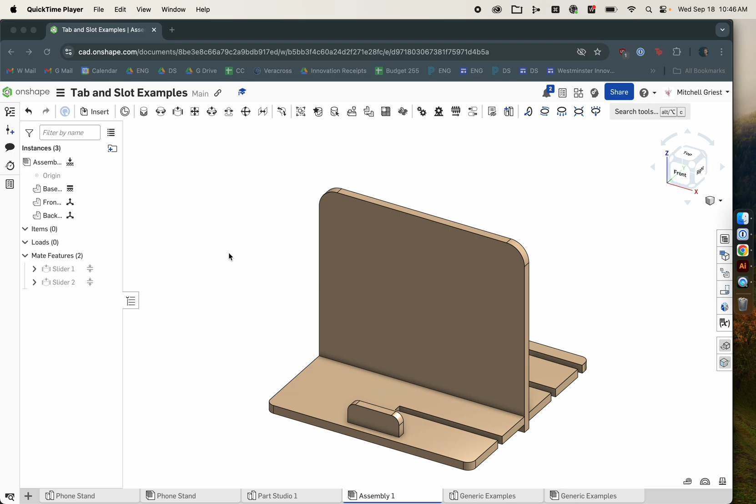Welcome to a quick tutorial where I'm going to show you how to create a nice laser cuttable file, kind of crossing from OnShape over to Adobe Illustrator so we can send it to the laser cutter. So for this example we're going to use the phone stand from the other tutorial where we've got these three different pieces that we've designed. So we're calling this kind of the front stop, the back stop, and the base.

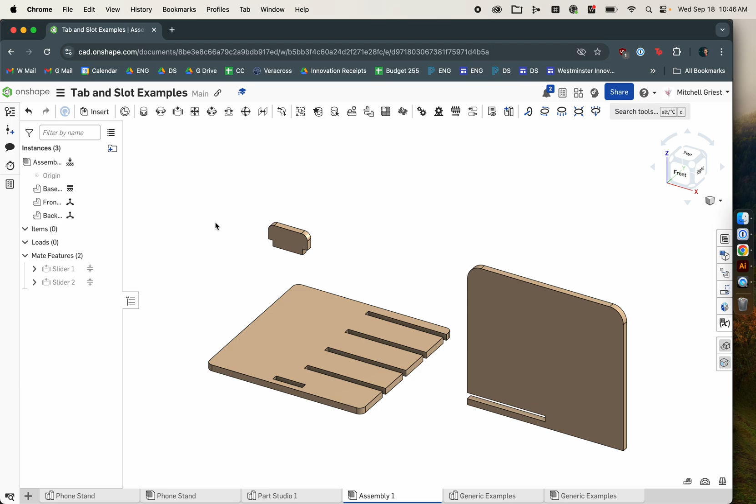So when we want to laser cut something, we can't actually send it directly from OnShape into our laser cutter. We have to go through Adobe Illustrator first. So we're going to create three what are called DXF files, which are just a type of vector format that the laser cutter and Adobe Illustrator both understand and that OnShape can export.

So we're going to go to our part studio, not our assembly, and let's hide all of our parts and just turn on just the base. If our parts weren't overlapping, we could do this without hiding things, but no big deal, we'll show just the base. If we click once on this top surface, right, this yellow area is what we want to give to the laser cutter. It only is going to understand 2D images.

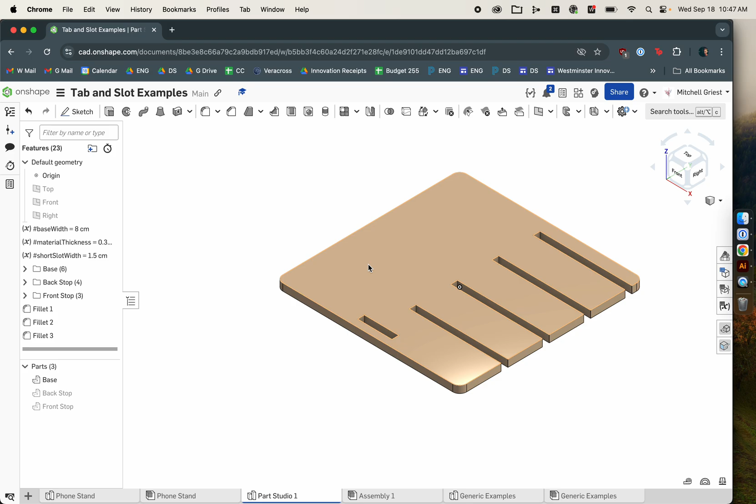Now we modeled this thing in 3 dimensions so that we could visualize how it would fit together as it's going to exist in the real world, but as far as the laser cutter is concerned, we just need 2D images or 2D sketches to give to it.

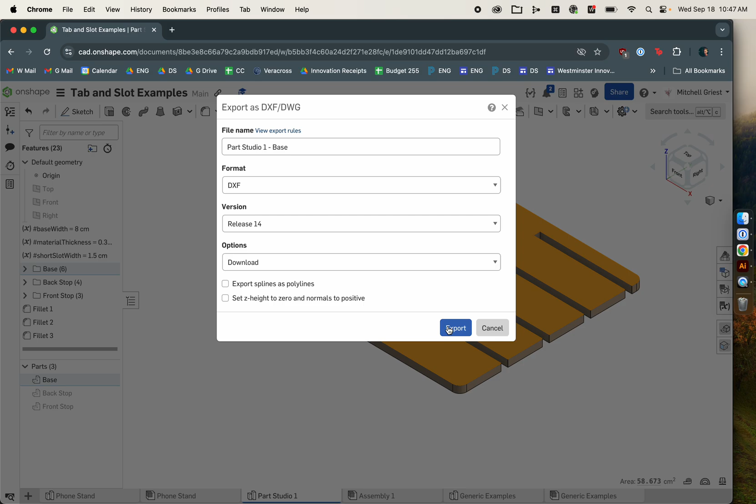So if we click once on this top surface and then right click, we can choose export as DXF. So that's going to allow us to export this. We can give it a name. It's going to default to the name of the part studio and then the name of the part. That's totally fine. And so we're just going to say export. So that file is ready.

We'll do the same thing for the backstop. So just clicking on the most interesting face, exporting as DXF, and then we'll hide that part and do the same for this little front stop.

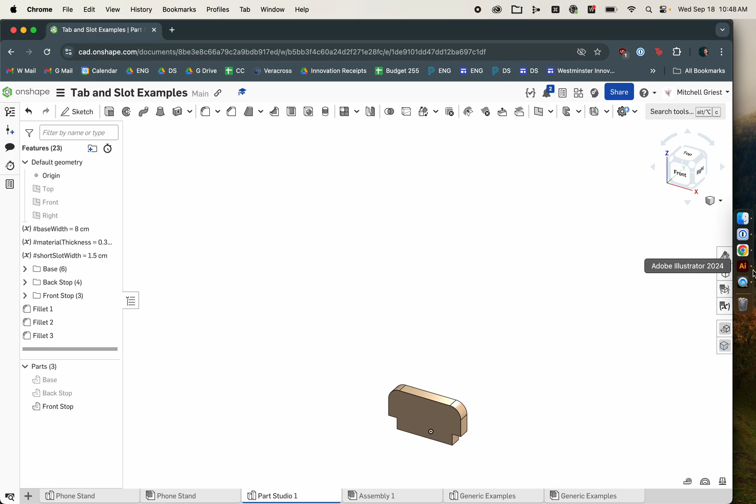So now that I've exported all 3 pieces, I'm going to open Adobe Illustrator and make a new file. I want to make sure that I set my measurement units to be the same thing I'm using in OnShape. So in this case that's centimeters, and I'm going to make my file an arbitrary size, maybe 20 by 20 centimeters for now. I want to make sure I have CMYK color selected and that we are using artboards. So we'll say create, and it should just give me a blank 20 by 20 centimeter canvas onto which I can drop my files.

So there's 2 ways to get my DXF files into Adobe Illustrator. I can go to File, Place, or I can hit Command-Shift-P. That's going to allow me to go and grab from downloads those 3 DXF files. So I can actually highlight all 3 of them and hit Place. And I don't want to click and drag because that would change the scale away from the dimensions that I've defined. So I'm just going to click once for each part, and I'm going to click once into kind of separate areas so they don't overlap at the beginning.

So these are the 3 basic shapes I've got that are technically ready for laser cutting as is, but you'll notice if I grab one of them right now, they're clear, no big deal there. These are technically ready to laser cut as is, but if I wanted to do any kind of engraving, I'd have to follow this next step.

So if you're only laser cutting your parts, all you really have to do is lay them out. You can actually lay them out pretty close to one another, and the laser cutter is precise enough not to have any issue with having this thin line of material in between. So if I were to go to Object, Artboards, and Fit to Artwork Bounds, this file is ready to laser cut as is, which is great. But if we wanted to do any engraving onto these parts, we have to follow the next set of steps.